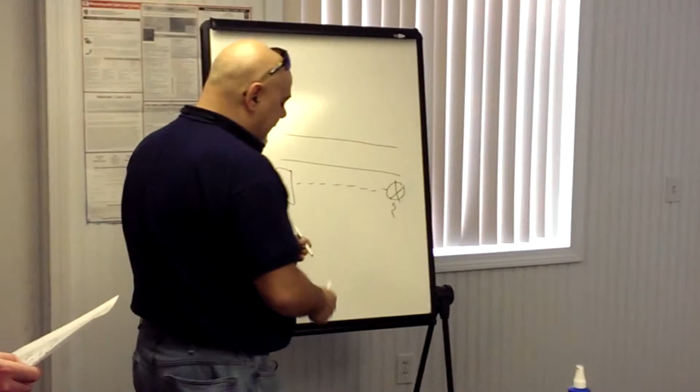It also tells me where it's located. If you notice, you have the streets like this, and then you have that pole number 2 over here, and then you have your dash going to a vault. That kind of tells me where the vault is, right? Well, if this is the street boundaries, does that tell me the vault's in the street? No, it's most likely in the sidewalk.

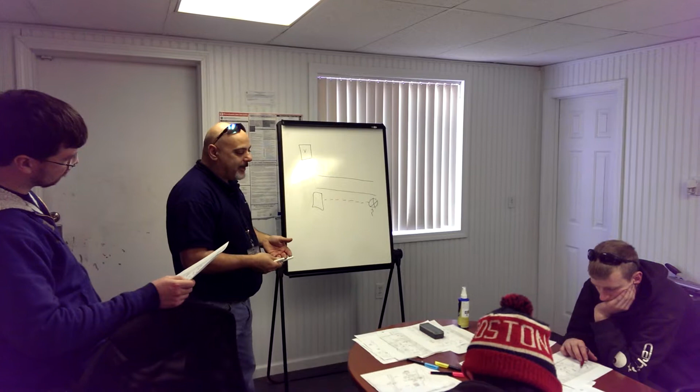Here's a little trick, a bit more understanding about this. We have a thing called a franchise agreement with the towns that gives us permission to utilize their property to place our equipment. Do we have a franchise agreement with any property owners? No. Who do we have it with? Towns. So why would our equipment be on private property? It won't be. It would be on city property.

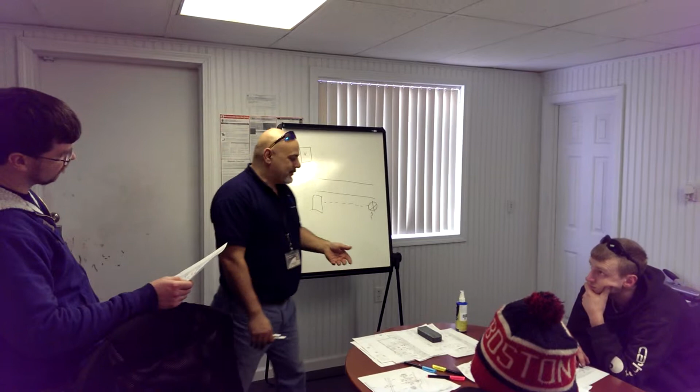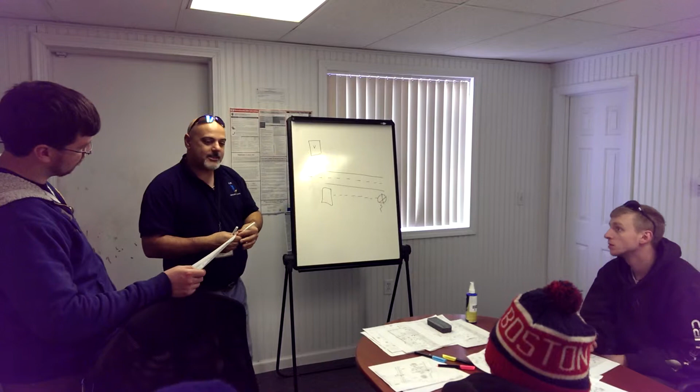So if you see that, I can guarantee you it's within 15 feet of the center line of a street. Why do I know that? Because the city owns 15 feet from the center line out.

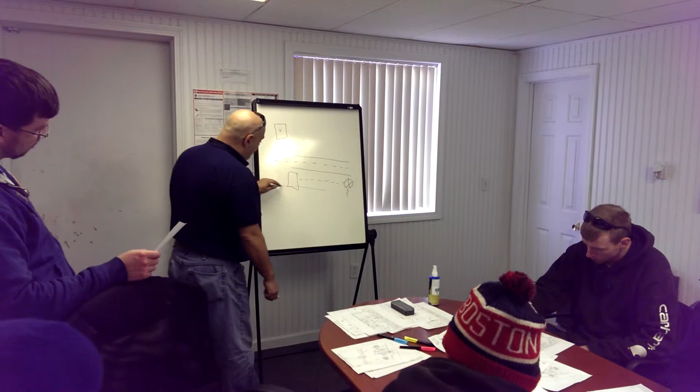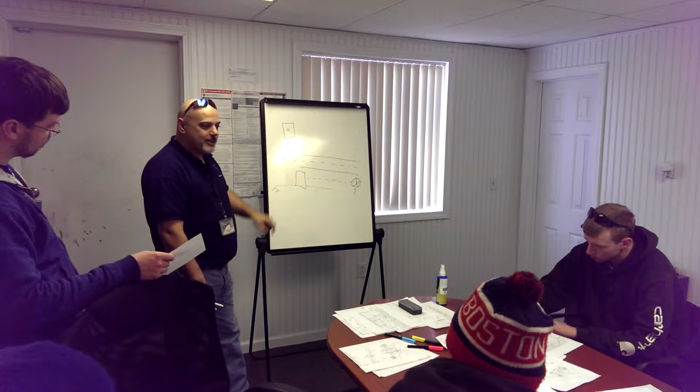We try to place our vaults so they match the property line. Why? Because if it was in the city street and I wanted to feed that customer, I'd have to go back to the city and get a permit to go the 3 inches that I was on their property. By placing the back of the vault on the property line, I now can dig underneath, be on private property, and not have to worry about a permit moving forward.

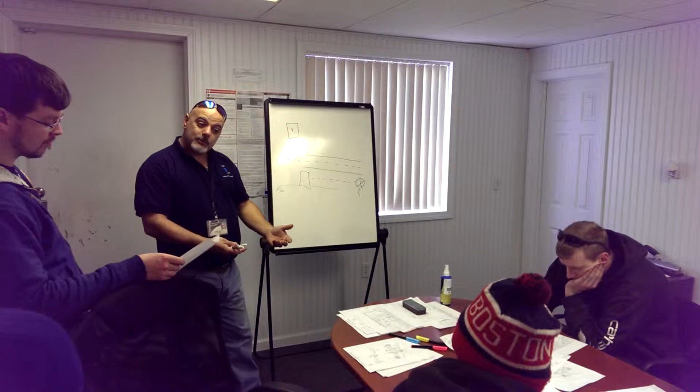So little trick, you're out there looking for a vault. On standard, 15 feet away from the center line is usually, for the most part, those are single lane roads. Dual lane roads, add 8 feet to that, because every lane is 8 feet. So if you're looking at a dual lane road, you're going to be at 23 feet off the center line. Standard, not all the time, but for the most part, it's a good set base.

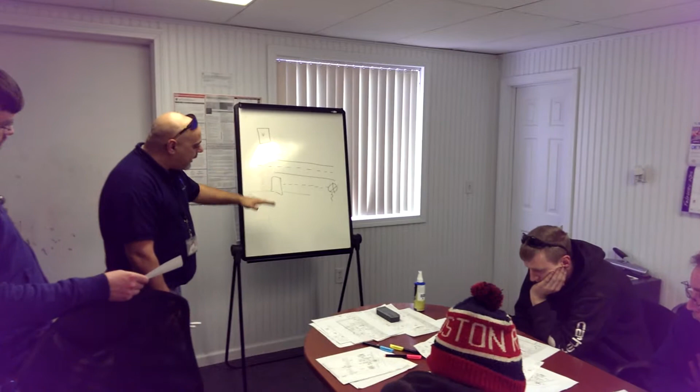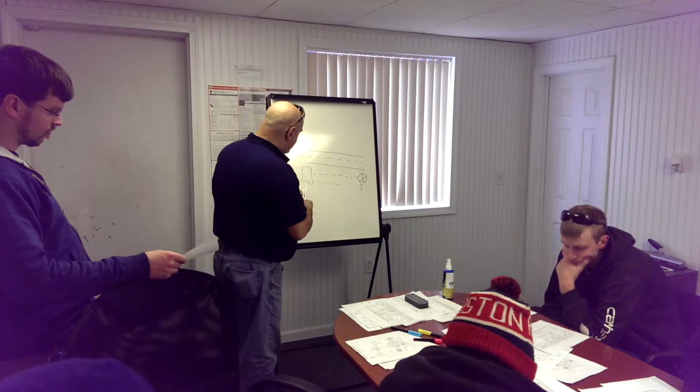So that tells me that vault sitting right there is on the sidewalk because it's back off the street. It's in a sidewalk, and it has a feed that goes over 120 feet to this square box. So wait a minute, one was open and one was colored in. And by the way, it continues on to another one, right? Mm-hmm.

Those are lock boxes. What's the difference between a lock box and a vault? Lock boxes are in buildings or attached to buildings. Vaults are in the ground. That's how I know I'm not looking for a vault here, I'm looking for a lock box.

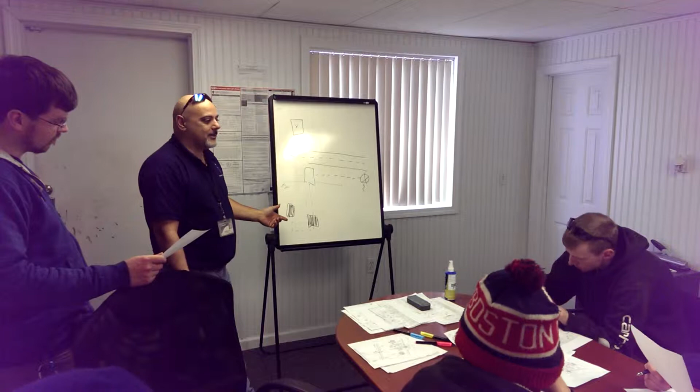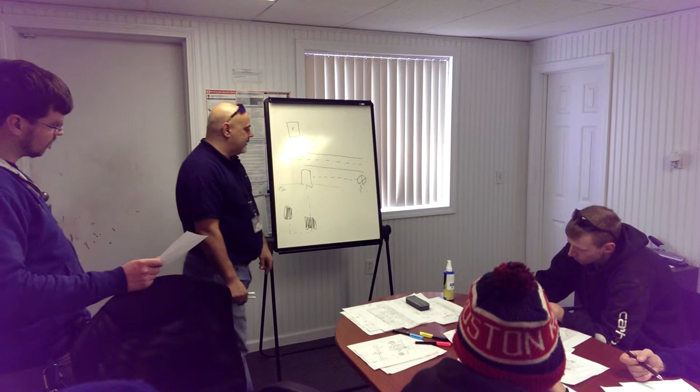Lock boxes come in different sizes, but they're pretty standard - our colors are gray. So that tells me what I'm looking at right here: I have a riser pole that's number 3 that has no house count on it. It's a utility pole because it's joint owned.

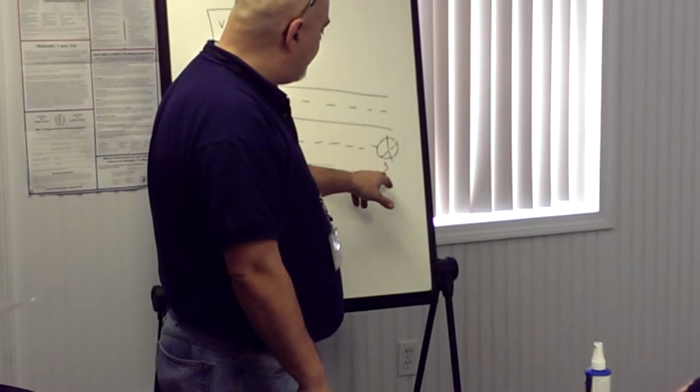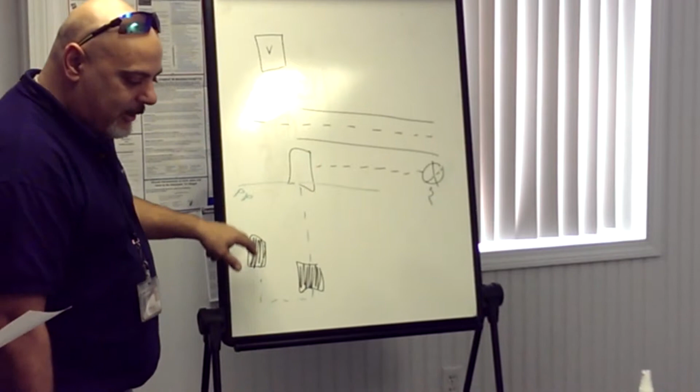Being at a riser, it has an aerial feed coming to it, a cable coming down, going across in an underground pipe. Don't know if it's direct buried - that doesn't tell you anything, it just tells you it's there. And then from there, it feeds into 5 different locations. One of them happens to be over here, which I know is the fire station, just from knowing. That's how I know it.

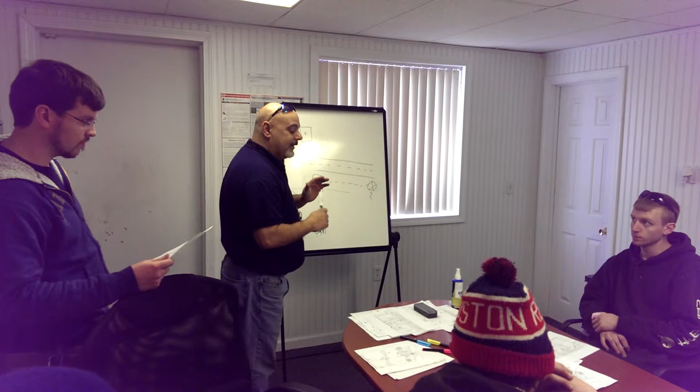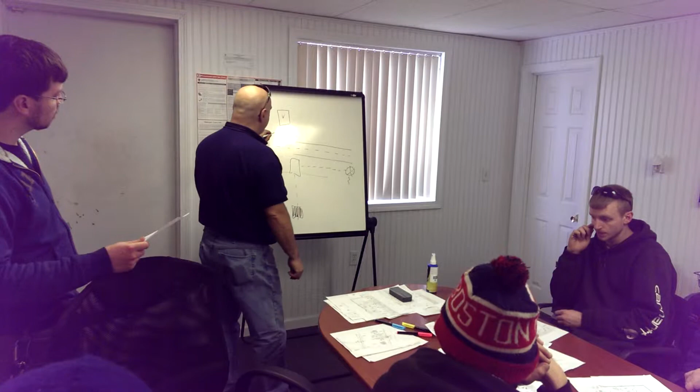So then you have those symbols, but then you have this symbol. Looks like that. So you have vaults, you know that. What do you think this symbol is? Riser? Pedestal. Pedestal, so that's the difference. If I'm out there and I see this symbol, I'm not looking for a vault, I'm looking for a pedestal.

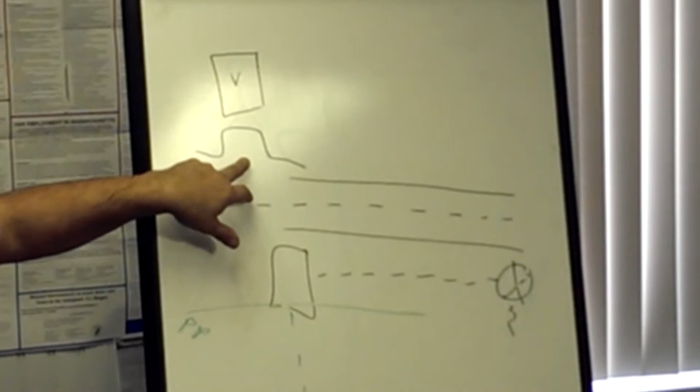You all know what pedestals are, right? They stick about 2 feet out of the ground, you trip on them, people run them over with lawnmowers and plows and stuff like that.

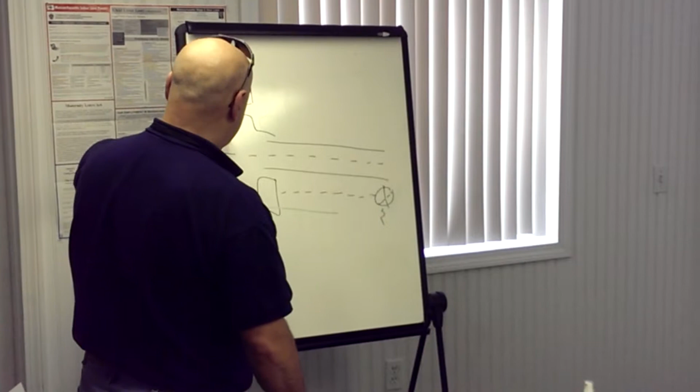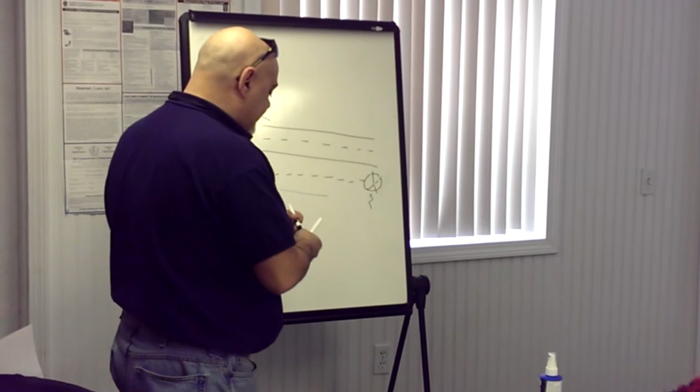So basically, what you're saying is this dotted line from that vault, if it had a pedestal in it, you get a dotted line, and in that dotted line it'd be one of those? Yep, it would look like this. So you'd have the dotted line, and then all of a sudden you'd have this. Okay, there's a pedestal there. Perfect, instead of a vault.

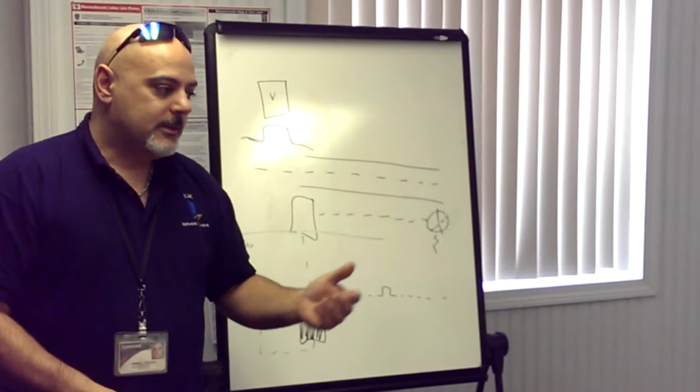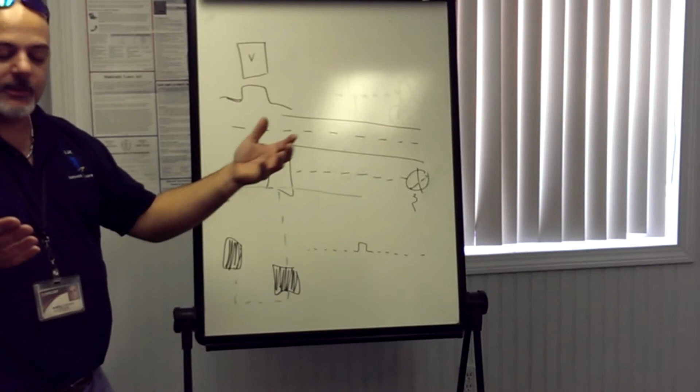Our goal is to always install pedestals versus vaults. Got it? We always want to do that, cost-wise. Doesn't always work that way - we kind of go with what the development has. If everybody else is putting vaults in, we're going to put vaults in.

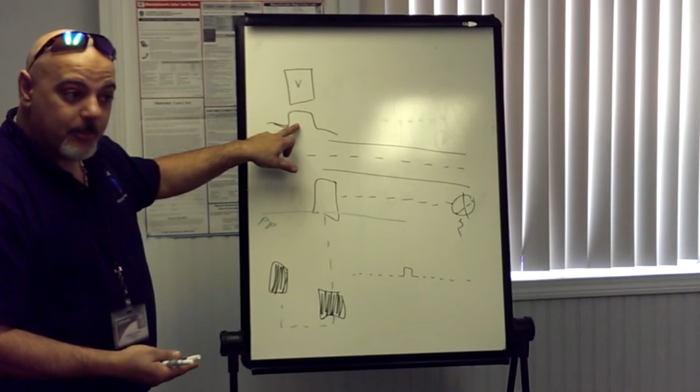The only time we will change that is at what we call a doghouse. That's where our amplifiers would go in. In that case, same symbol - the symbol doesn't change, it's just that it's going to have a doghouse. So basically, that's just showing that there's something going to be above ground.